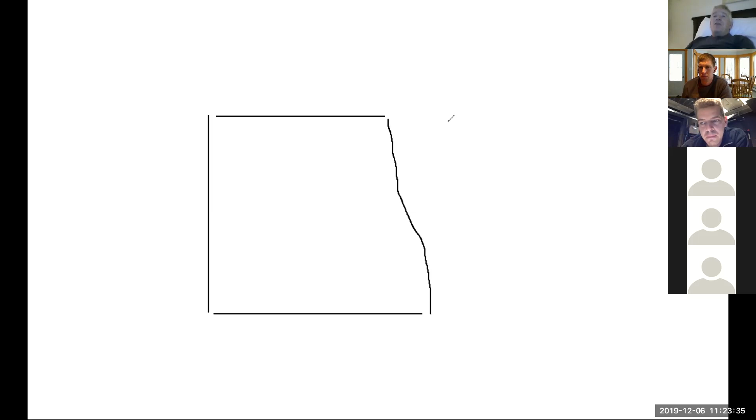Because if the first line you're off 4 centimeters, which isn't much, right, and the next time you drive, you're another 4 centimeters off, now you're 8 centimeters off. And then you're 12 or 20, and before you know it, you're a meter off of where you should be. To get your third tram line, you'd be way off.

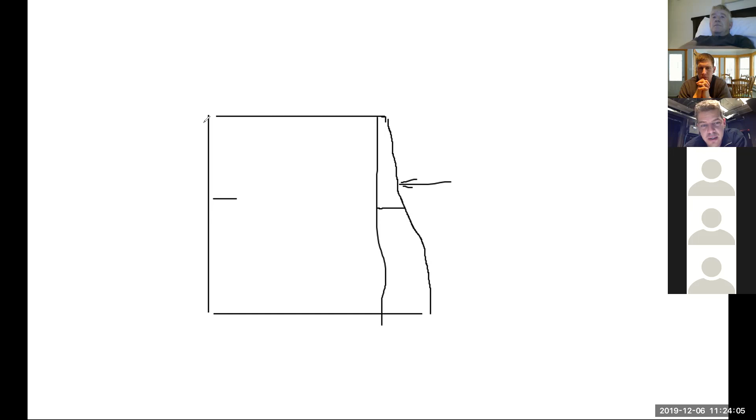Well, first I will do this side, and then stop here, and then start this side. Finish up then there. Start there, and then go back inside and fill this one up. That's how I finish my fields. And then do the headlands, this side, this one, and over there.

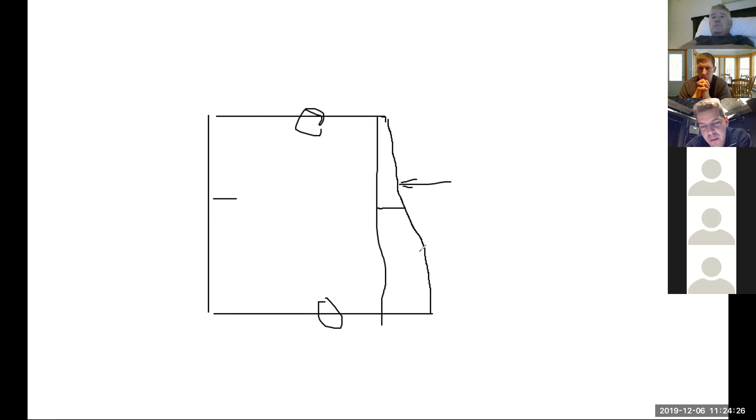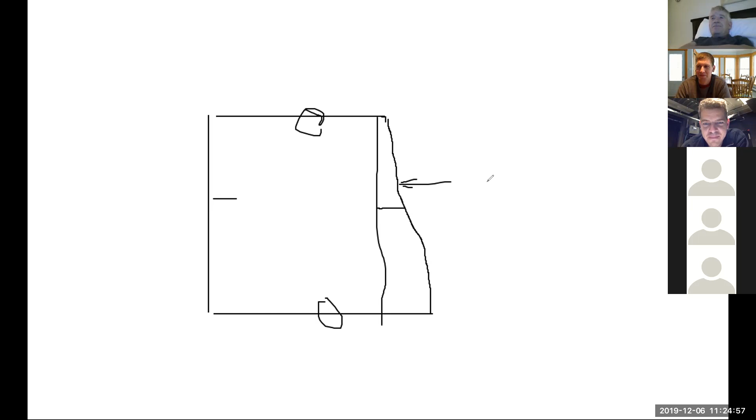But what are we trying to accomplish? I understand that if you're doing the curve, every curve is the same line as this one, and if you do the boundary line, the contour line, then the spacing should be equal. But you kind of can't have both. No, I understand that. A contour that follows the last one, but yet is spaced properly, at once. Or at least I don't understand how you could do it.

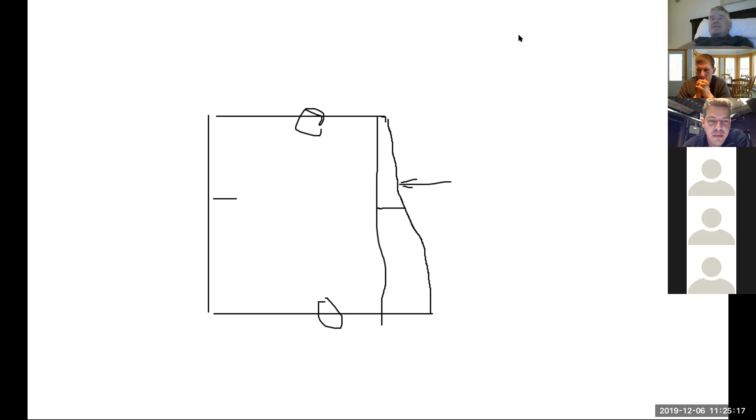The earth is still curved. Yeah, as soon as you go around a corner, you end up with different radiuses as the curve gets smaller. And that's very difficult to calculate. I understand that absolutely. You can't make a circle with a square piece of equipment. A round peg in a square hole concept.

Yeah, it's tricky. Well, there's always going to be overlap, unless you have ideal section control where every opener has its own section control. On 3-meter seeding equipment, do you have individual opener section control? No, but we could. I have 4 valves in my seeder to make tramlines. They cost about $250 a piece, and we have 30 foot rows, so it's going to be a very expensive thing to shut off every valve.

Here in North America, they say if you have 5,000 hectares, that pays for itself. Well, I have about 20 hectares. So all of a sudden the math falls apart.

Yes, absolutely. I've been asking this overlap question on Twitter, and I'm finding that my fellow farmers in North America, and I'll say they are like I was, just don't understand how farming happens in the rest of the world. We are quite unique in North America because we have these big square fields, but other than maybe Brazil or Argentina, those fields just don't exist anywhere else in the world. It's smaller plots of land that are curvy, smaller farmers, smaller equipment, and that sort of thing. We make up like 1% of that. So when it comes to software, there's huge considerations for people like yourself, Richard, and Andreas, and all over Europe, all over Africa, all over South America, and many other countries where none of what we do here in North America makes any sense whatsoever. For me, that's been a huge awakening.

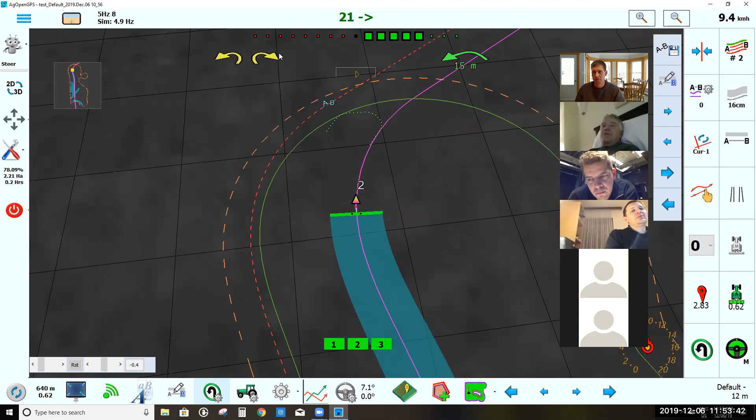Remember the original headland use, where it turned sections off and on? The tricky part was when you have a field like this, you never knew when you were inside or when you were actually turning and when you were leaving and when you could reset. It was so hard. And now with the U-turn function, I know exactly when I'm turning around. And then all the headland has to do is turn the sections off and on, instead of also having to determine where the tractor is. Yep, okay, just stop right there.

Okay, suppose that the headland line is basically lines up with the right side of the tool. The headland, yeah, okay, if it's here. Okay, no, that's the U-turn. Imagine a line, yeah, there. Now move to the outside, there. Now imagine if there was another line, the headland line, that looked like the U-turn line, except its distance from the boundary was there.

The same way I can detect when we drive outside of the boundary, you know how the sections turn off? I can do that on the headland line, so that the sections will just turn off, and you don't have to start anything. As soon as the tool is completely outside the headland, it turns off. Kind of opposite to what the boundary does.

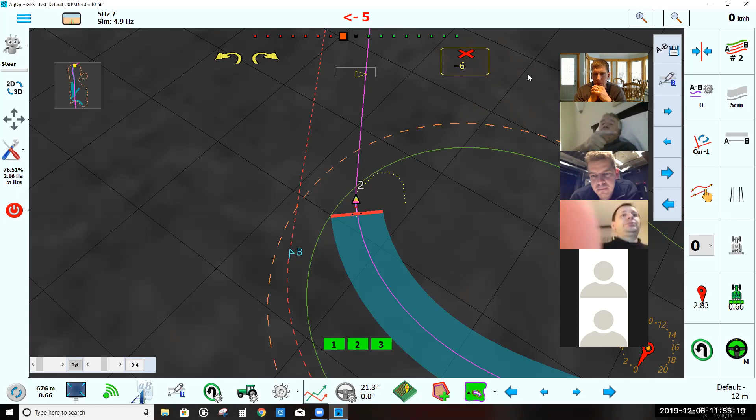Yeah, the trick previously with headland and not having the U-turn is there were always those edge cases where you didn't know where the tractor was in the U-turn loop. But now that is solid. I rarely ever find U-turn messing up. So we know where the tractor is, we know what direction the tractor is, we know I'm getting feedback. We know when it's turning, we know when it's leaving, we know when it's entering. So we can kind of go back to the old U-turn with using a headland and the new U-turn code.

Yeah, I just want to say it's coming. That's my next project, is to work on that headland thing. Should be less than a day.

See how that purple line starts getting closer to the reference line because it's a sharp angle. Yeah, that's an extreme instance because it's a curve, right? But I think that'll be a really big step forward as well.

Have you thought about driving backwards? Did you watch that video, Richard, where I'm driving backwards down the road? Yeah, I see it—I just about drove over that guy in the truck. I'm looking at the computer, looking for it. I look back, okay, there's nobody there, and I start fiddling on the computer. I turn around again, and there's a truck—backed over the guy. He had these big eyes, these tractor duals coming at him in reverse.

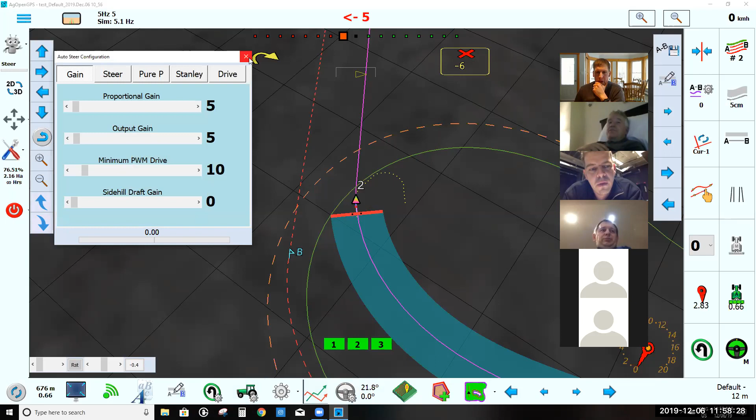Yeah, absolutely. The other thing—Andreas was right on—you should be able to set up the Arduino from within AgOpenGPS. You shouldn't have to edit a text file in the Arduino code to set up your Arduino. I should just be able to send that, and it's stored on EEPROM.

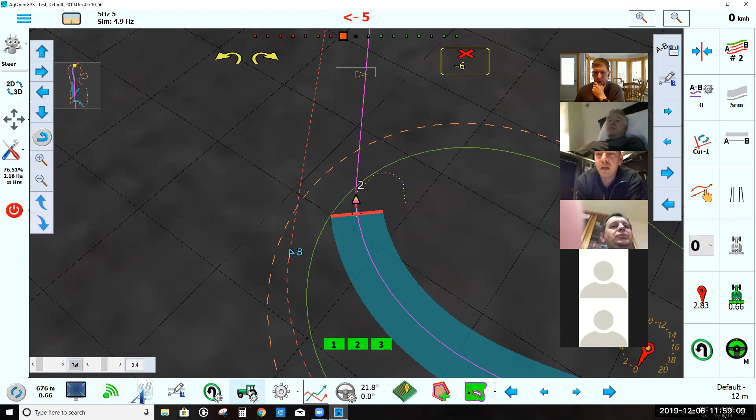Every time you make a change in AgOpenGPS now, like on that steer setting screen that Wilbert pulls up, it sends it off to the Arduino. So it's just another form, like this one that says, make it the opposite wheel angle sensor—is it leaning the wrong way? Uncheck the box, now it leans the other way. It should be able to graphically modify the steering module within a window in AgOpenGPS. I think that would be a real step up too.

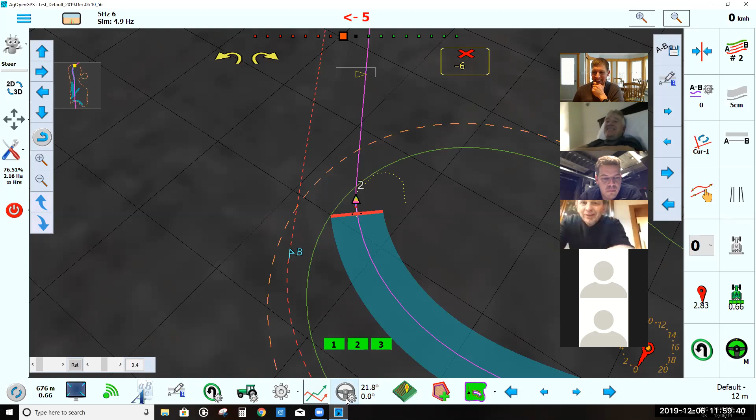Wouldn't it, Andreas? Yes, yes, it would. You're so agreeable.

So, sorry, I don't have time much today.

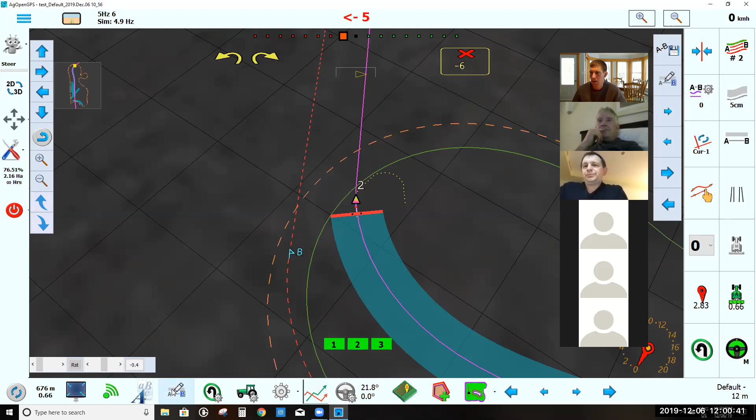Let me back up. Wilbert, how should that AB edit button look? What should it look like—this one here? Should it be the pencil thing, like at the bottom? That makes more sense to me, because here you can tell there's the curve line and the straight line. So it's a setting, the gear icon, which is good, but I think this might almost be a better icon if we add a little squiggle to it—it just feels like we have too much duplication, right?

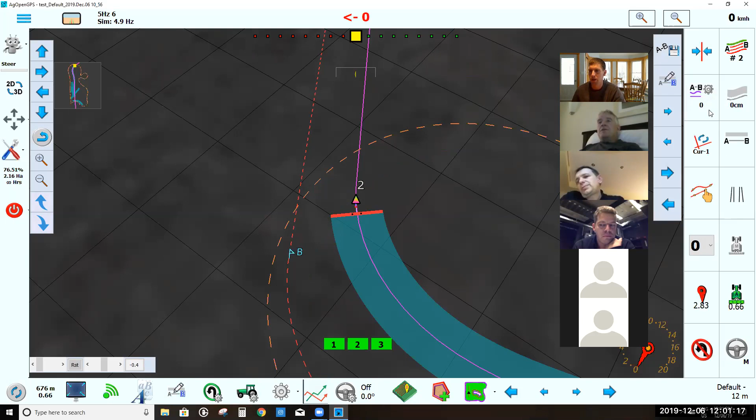So is this button the same as this button, kind of thing? Well, the one at the bottom saves, pushing the button that you're on now, and it's a quick way to get to that A/B edit.

I'm pretty proud of that A/B edit form because you can literally edit everything. Yeah, I think you don't need—you only need the A/B edit button instead of also the arrows on the right side below, and the extra flip-out menu. Just the A/B edit button should be enough.

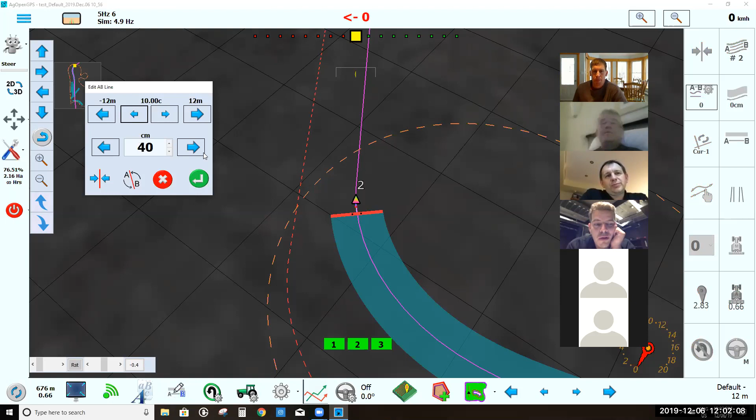Can you bring up the A/B edit screen, Wilbert? This one here. Yeah, oh yeah, I guess you can do it all there. Yeah, I think that should be enough, and that should be the only place to edit it.

Okay, that makes sense, because if they're at the bottom already. Yeah, on the right bottom, but you mean? But then you have no way to save it. That's the tricky part. If you press the green enter button, then it should be saved, right? Yeah, but then what do you... So then the snap or the move, the A/B line buttons at the bottom, they can just be a temporary move.

Oh, here, these ones. Why should you temporarily move the A/B line? Suppose you're doing a plot. Suppose you are going around a slough. Suppose you... We actually use that a lot just to temporarily move the line.

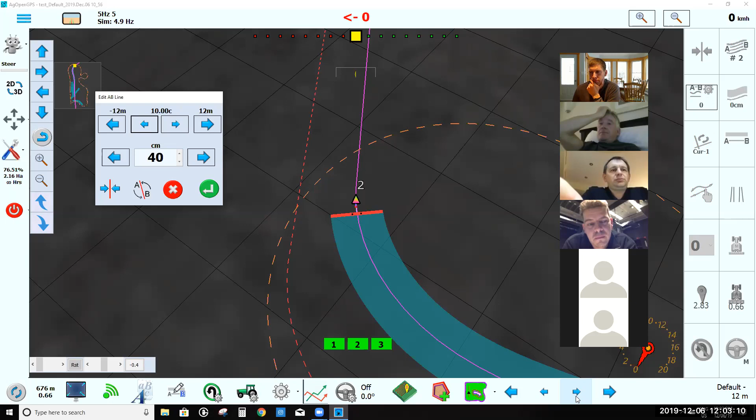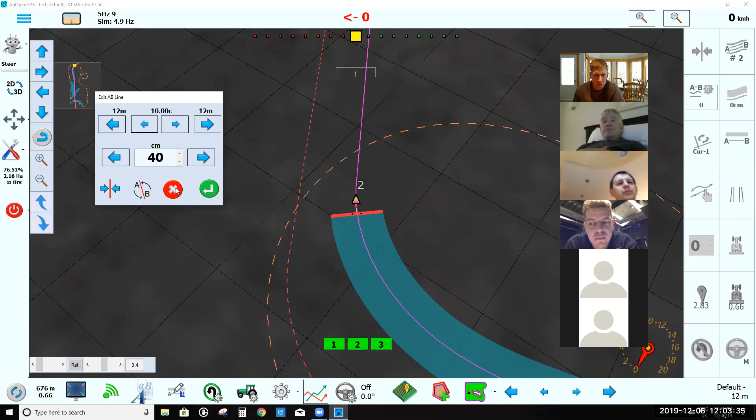I don't know, maybe you should make an extra button in the A/B edit line where you just can set enter, and then it should be remembered, or just say temporary, like the A/B line smoothing does. Yeah, here's that one, something like that maybe. Man, I can't remember where. I'm still getting used to the new layout, so it's tricky for me to find it all quick.

Me too. How is A/B smooth? Where's that one again? Is that here? Oh yeah, here. Yeah, smooth A/B, just click that.

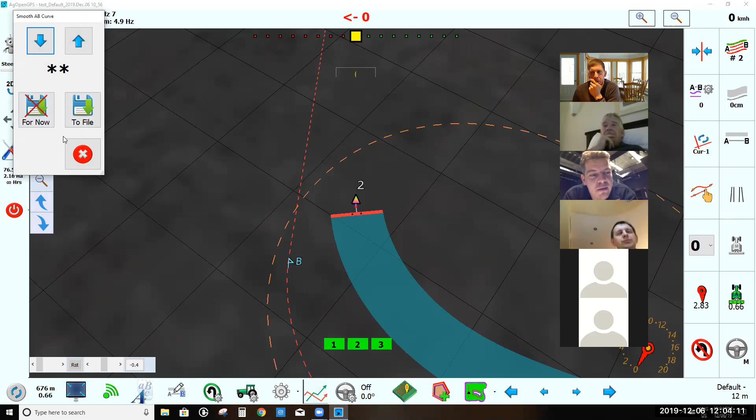And then it's like for now, and to file, save to file. That same idea, that's not very clear either. Is that clear enough? Just delete the arrow on the floppy disk. Or I mean the crosshair. No, delete the crosshair. But then it would be both the same button. There's text. Yeah, I don't know. Should be good.

Yeah, let's find a difficult icon for that. But I think that should be a good option, to have a best of both worlds. I mean, you can just... oh no, if you hit cancel on the A/B edit, then it returns to where it was. Okay, yes. So if I go A/B edit, as in this one.

Oh no, that's an A/B line. Now change your line, go up in there and change the reference line somewhere else. Yeah, move it over. Okay, and then I hit enter. Now it'll be saved. Did you hit save or cancel?

I hit, oh shoot, this one. Sorry, I hit this button. Yeah, okay, move it again, move it like a bunch over. Like that? Hey, where'd the reference line go? Oh, that's what I'm moving, sorry.

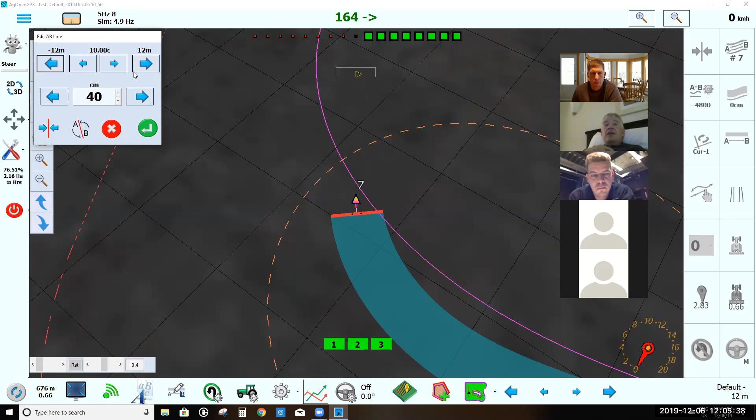Oh, okay, now hit cancel. Or no, move it out of the way, move it different than it was. Oh, okay, hold on, move it way over here. How about that? Okay, now hit the cancel, the red X. And then it... that starts, returns it back to where it was. Yeah.

That's so cool. I guess technically we need a third button. Oh no, I know, or just don't worry about it. I think, yeah, I don't know. And as far as layout, I'm glad I have you guys here to suffer my thought process with this, because it's like, oh shit, what do you do?

Yeah, but I think if you just have that edit A/B line or A/B curve, it's good enough, and then just delete all the other menus, arrows, everything, like right where your mouse is now, and just have that button. And maybe get rid of it on the right, get rid of it completely on the right side. Just maybe leave... yeah, just remove that one, this whole menu, and place that A/B edit button where your mouse is now.

Yep, and maybe leave the set line to your tractor above your mouse. Yeah, how do you call it, like the snap, that's a handy one. That one, just leave it there. That should be handy. Yeah, but I think then deleting all the other arrow thing should be a little bit less complicated. I agree.

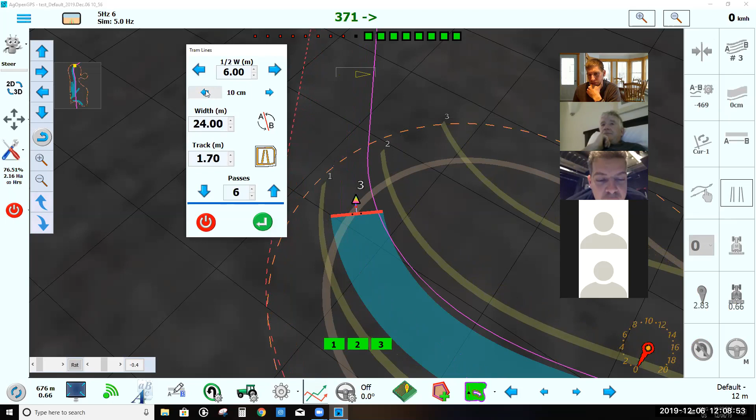Is the tram menu good? Just bring up, click that. Does the menu work? Does that form work? I tested it out, is it intuitive? I'd say it's worked fine. But I still have to figure out about that offset thing and set the boundary outside the field of the reference, outside of your boundary and everything else. But yeah, it will make sense.

Nice to be able to move the field around with those arrow buttons, and zoom in on what you want. Could it be a good option too, if you open the edit tram, you just have a plop directly overview, like this helicopter thing?

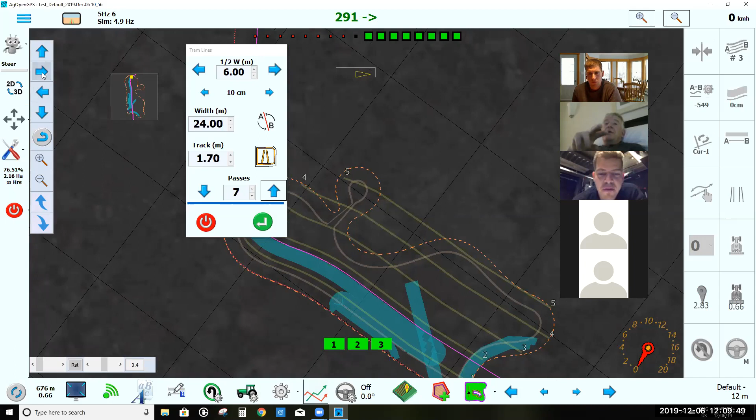So if I even have that, I had tram. The tram was originally written in like the AB touch lines. I originally had that, then I thought, why not just use what's there? Because this way it's non-modal, meaning you're not locked into that window. You can do anything you want here now.

But I mean more a zoom overview function, like you have in the left down corner. But you can just hit extents down at the bottom there. Yeah, hit it again. So it's already there. But now you want to be able to zoom in and make sure that line is dead on the boundary. Yeah, that's also true.

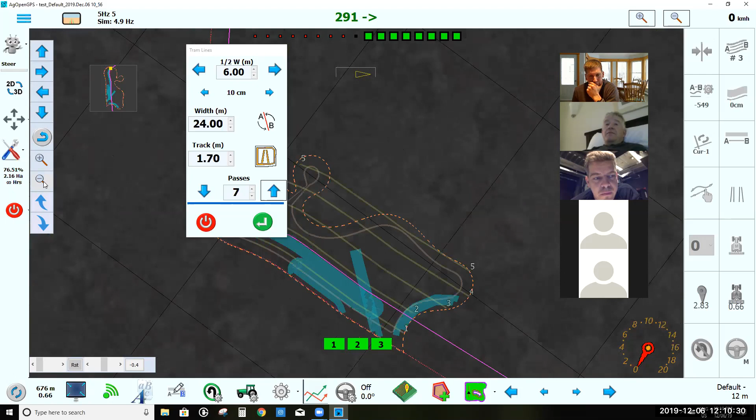You got to move the thing up, use the up arrow. Now zoom in on that line. Yeah, that's the most - see, that's why I was asking, like in the AB creation, should it default to 0? So that line is always made on the boundary.

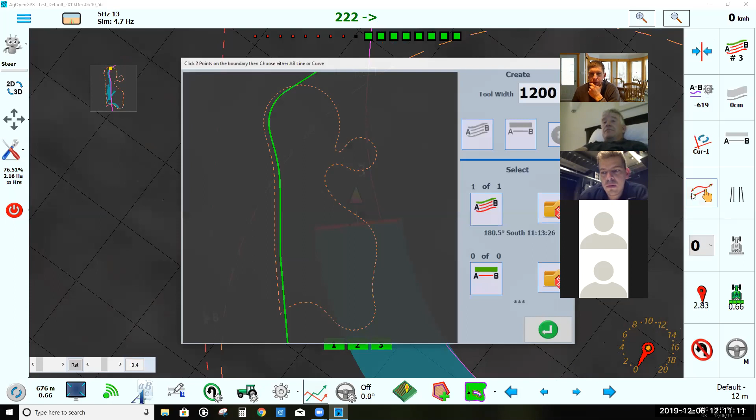Yeah, I understand what you mean. Now you don't have to go back and put it back on the boundary and then move it. So if we closed this, and went to this button, for example, like when you click here, let's just make an AB line. Boom, boom, and we'll use that one. Like that tool width at the top, that should say 0.

This tool width here, yeah. Just delete your curve line for a sec. Now at tool width, put 0. Okay, now make that same AB curve line again.

Yes. Hey, that was cool - you made both lines at once. Oh no, the other line was there. Sorry, never mind, brain fart.

So now go back to your tram. Okay, I'll zoom out a little bit here. Oh, I'm gonna flip my - no, too far. Got to flip your AB too. There we go. So now 1, 2, 3.

That's a handy freaking button. Oh, I like that a lot. There's a lot of handy buttons in this thing. Yeah, so now you're dead on.

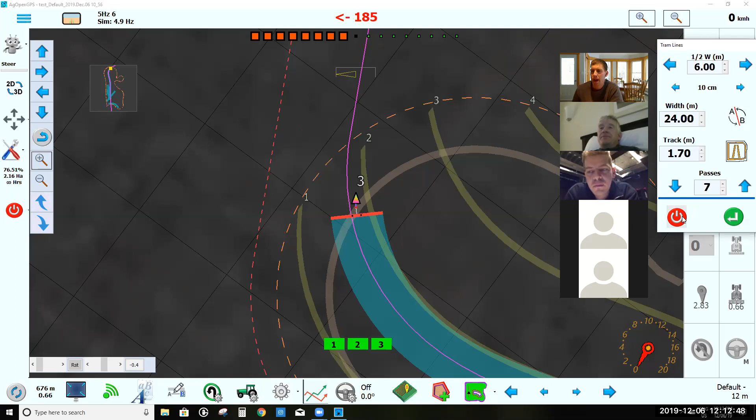Now all you got to do is go click half width. Half width here, yeah. Now click that to the left. Left. Yep, there, now you're set up. Yeah, I understand, really good, that default is good. I like that, so we'll default that to 0.

The other defaults I thought too were once you set up your steering - where is that one here? We can almost set these ahead of time right now, like those are the defaults, but I think even with your steer motor, we could almost, like with the PCB board, default these to like 18, 13, whatever kind of works. Does that work on everybody's tractor? I think it almost does now, if we're going with the PCB. I suppose, and the same motor.

Yep, if you're using a Phidget motor, at least it would be close, right? Like this would not be the default setting. I don't know, with hydraulic valves it might be different, but... Yeah, they're absolutely different. Well, I put them low enough so that if somebody had a wild motor, it's not gonna kill themselves - that it just barely turns. Yeah, the safe way. But people don't need that, because you're not supposed to use it in the real world.

Just thought my lawyer asked me that again. When you install AgOpenGPS, there should be a screen coming up saying that you will not use it on the road or field or off road, that it's an example of programming only and is not to be used on any piece of equipment. And you should check OK.